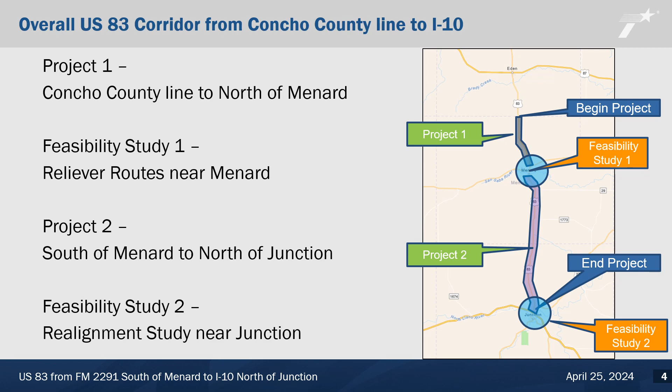The current goal for the corridor is to widen the existing facility to a 4-lane divided highway. Since the US 83 corridor has been designated as a future interstate highway, TxDOT is developing the 4-lane divided roadway to interstate standards, including design for future access control. The proposed improvements will tie to the north and south of the city of Menard, but TxDOT does not anticipate new roadway construction along US 83 within the city of Menard. As stated in the overview, reliever routes around Menard and alternative alignments for connecting to I-10 will be studied, but no design or construction of the alternative is anticipated at this time.

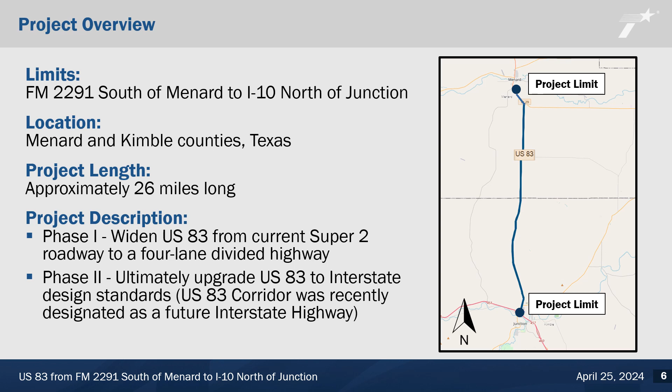The proposed project would extend for approximately 26 miles along US 83 from FM 2291 south of Menard to I-10 north of Junction, in Menard and Kimble counties, Texas. The goals and objectives for the project are to improve roadway safety, enhance mobility, and reduce traffic congestion. The existing US 83 is a two-lane roadway. TxDOT has recently added passing lanes to the corridor to improve operation and safety.

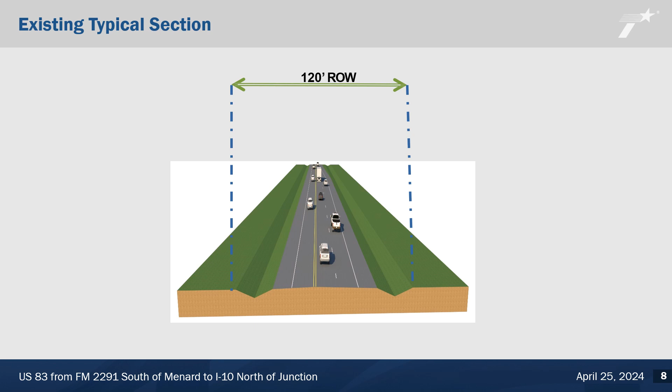The proposed interim improvements to US 83 are to widen the roadway to a four-lane divided highway.

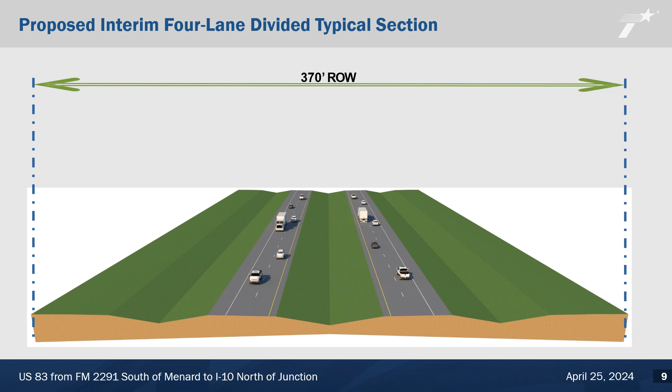As noted above, the US 83 corridor has been designated as a future interstate highway under Phase 2 of the current project. TxDOT is environmentally clearing the ultimate future typical section, which would provide controlled access on and off of the corridor, including ramping, frontage roads, and grade separation. These future improvements would be constructed as traffic and adjacent property access needs grow.

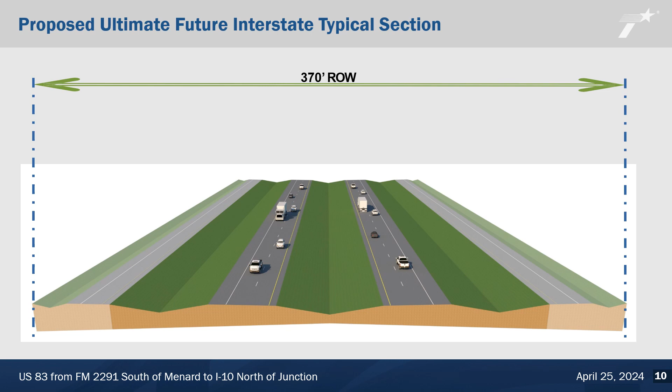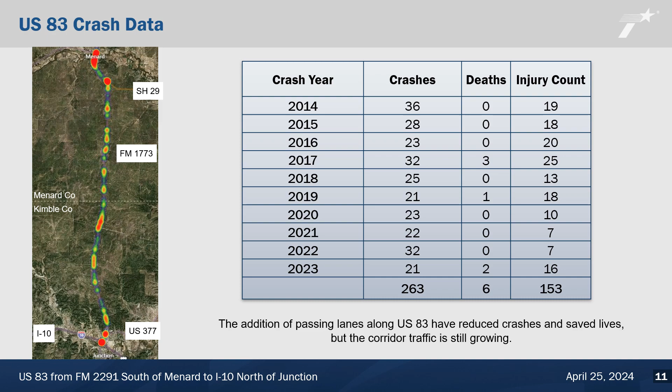In 2014, TxDOT completed the addition of alternating passing lanes south of Menard, which has reduced head-on crashes and fatalities along US 83. Traffic volumes and truck density, though, have continued to increase. Between 2019 and 2023, there have been 119 reported crashes with 3 fatalities along the US 83 corridor south of Menard. Expansion to a 4-lane divided section is warranted and proposed to further improve safety along the corridor.

Some of the resources and issues that will be assessed include air quality, traffic noise, social and community impacts, hazardous materials sites, biological resources such as threatened and endangered species, water resources, and historic and archaeological resources.

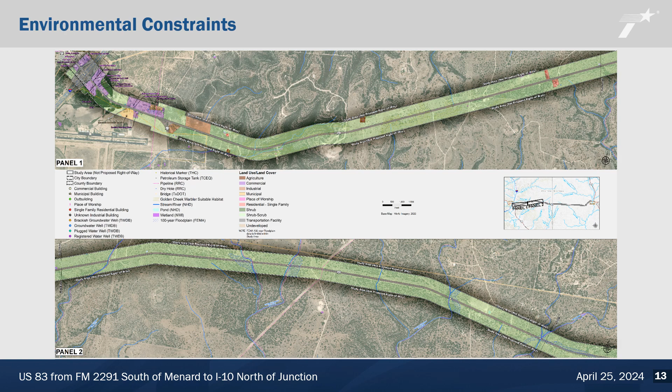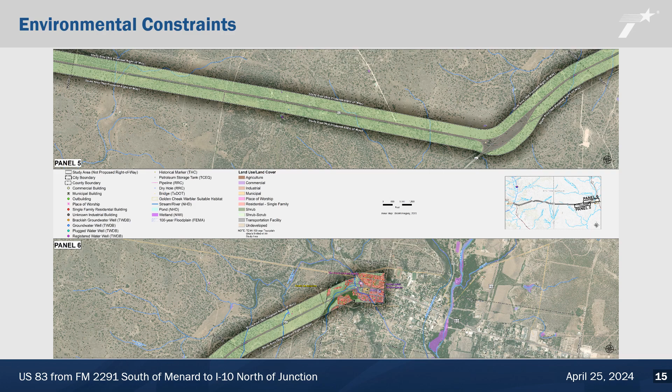This map shows constraints in the central portion of the project area. This map shows constraints in the eastern portion of the project area.

While comments are always welcome, they must be received or postmarked by Friday, May 10, 2024, to be included in the official meeting documentation. Responses to written comments received during the comment period will be included in the public meeting summary report that will be posted on the meeting webpage when completed.